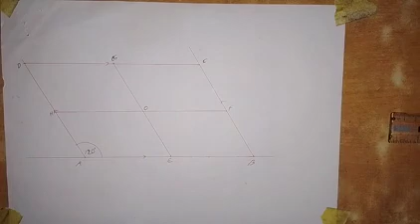Let me call the point of intersection point O. I'm going to divide OH and OF into a number of equal parts. I will also divide AH and DH into a number of equal parts, and the same applies to BF and CF. I'll do that while I pause the video. Alright, so I've divided the distances into 5 equal parts.

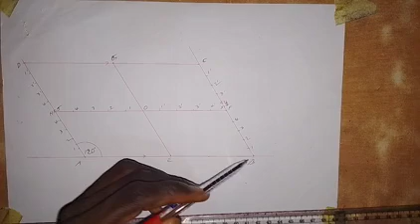As you can see, I divided OH into 5 equal parts and OF into 5 equal parts, and I've labeled them 1 to 5 and 1 prime to 5 prime. I did the same thing for AH, 1 to 5, and DH, 1 prime to 5 prime. Also BF is 1 to 5, and CF 1 prime to 5 prime. That is what I've done while I paused the video.

The number of equal parts that you divide the line into depends on you. I decided to divide into 5 equal parts. You may decide to make it 7 or 8 or 9 or 10. That is your own decision. It's as simple as that.

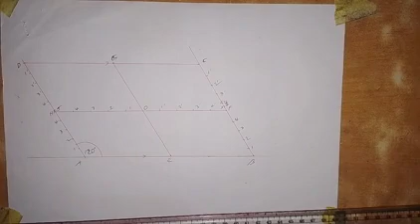Now let's see the next thing that we have to do for the construction of this ellipse in this parallelogram. I'm going to connect point 1 prime with point G here. So we connect 1 prime to point G, and also we connect 2 prime to point G.

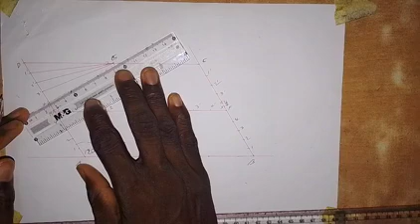Okay, then we connect 3 prime to point G. Also point 4 prime, we connect together with point G. Then 5 prime, we connect it with point G like this.

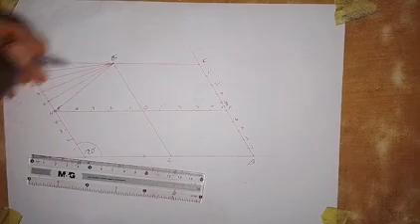Alright, so let me do the same thing here. I will do this half while we are doing it together. I will produce half of it, then I'll pause the video and do the remaining half, which is going to be similar to whatever we do here. When I'm done with that, I will show you what we have done. By that time we'll have made it a complete ellipse.

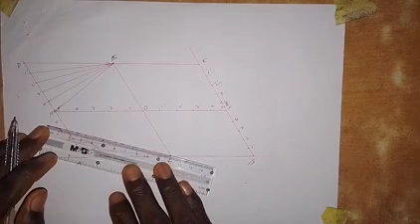So we also connect this point 1 here with point E. Okay, then we connect point 2 here with E. Also we connect point 3 with E. Then we connect point 4 with E. Okay, point 5, we connect together with point E.

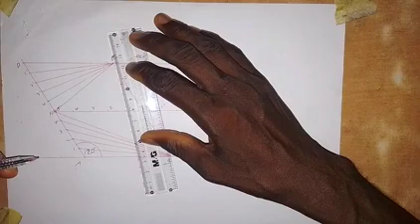Alright, the next thing that I'm going to do now is, from this point G here, I'm going to draw a straight line that will pass through point 1, then it will touch line 1 somewhere around here. This is what I mean. From G, I will draw a line that will pass through point 1 and meet line 1 at this point. So take note of this point.

Then we do the same thing from G. We draw a line passing through point 2, meeting line 2 at this point. So this is point 2. Then from G again, we draw a line passing through point 3, and meeting line 3 at this point. So here we have this point here.

Then from G again, we draw a line passing through point 4, like this, and it meets line 4 at this point, so this is the point here. Then we replicate the same thing.

From E here, I will draw a line passing through point 1, meeting line 1 at this point. So take note of this point. Then from E again, draw a line passing through point 2, meeting line 2 at this point. So that is 2 prime, and this is 1 prime.

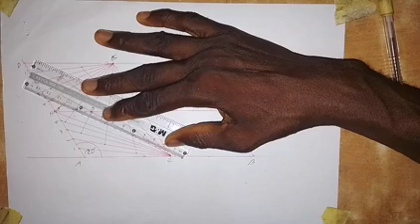Then from E again, we draw a line passing through point 3 and meeting line 3 prime. Okay, so it goes like this, meeting line 3 prime at this point. So this is where we have 3. Then we draw a line from E again, passing through point 4, meeting line 4 at this point, so we take note of this point.

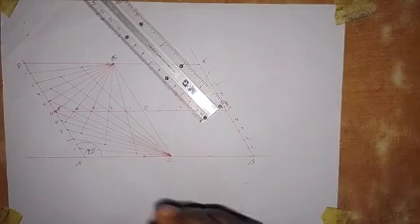Alright, so we join these points together with the use of a French curve. This is how it goes. From here, okay. Alright, so I can connect these 3 points together. You just need to adjust your French curve. So I connect these 3 points together like this, and I can adjust.

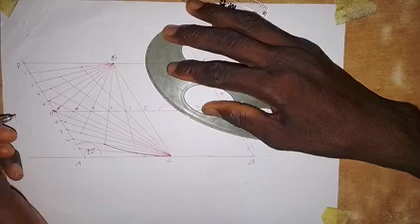So we are connecting together with point H here. So let's take note of that. Okay, I can connect this point together like this. Okay, so that is a quarter. So we have done a quarter of it.

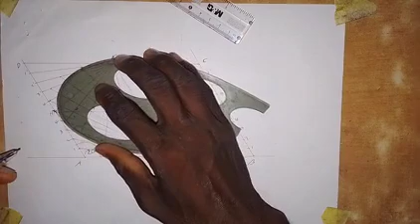Then, if we turn to this side, we are starting from here, connecting it with this point G. If I adjust my French curve, I can join these 4 points together like this. Alright, then I can also adjust my French curve. Let me connect these 2 points together. Then I can join these 2 points together.

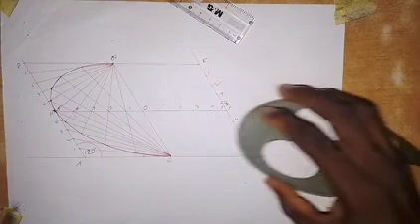Alright, so we have produced half of it. What I did here is what I'm going to repeat on this side. I'll pause the video and do that. When I'm done, I will come and show you what we obtain.

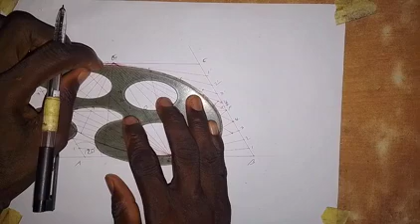Alright, I just decided that we should do the joining together. What I did here is what I repeated here. But let's do the joining of the points together with the use of a French curve. Okay, so I've obtained the points. Then with my French curve here, I want to join the points together. So I can join these 3 points together like this from this point G.

Then adjusting my French curve, I can go on and join these 3 points to point F. So I have this. Alright, then coming down here like this. Okay, I need to set it like this. Alright, I can go on and join these 4 points together. So it goes like this.

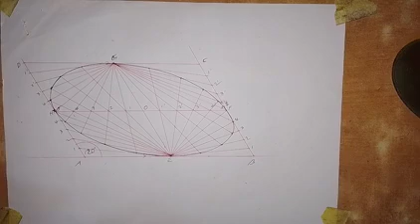Alright, then we have this point. Okay, I can adjust and join these 3 points together, this point and this point. Alright, so this is how the ellipse will look. It's as simple as I've done it here. All you need to do is to practice, and when you practice it, you become a master at it.